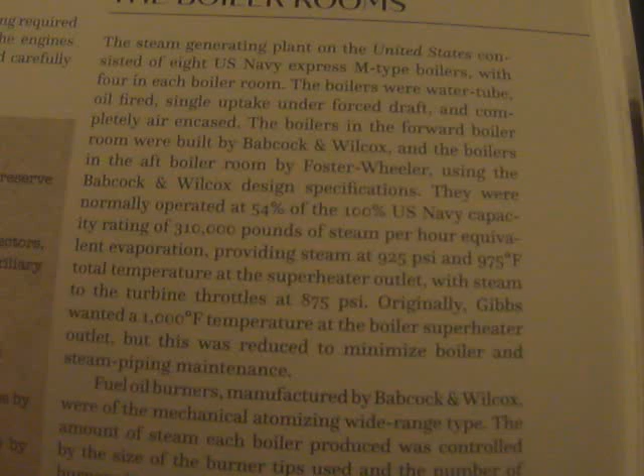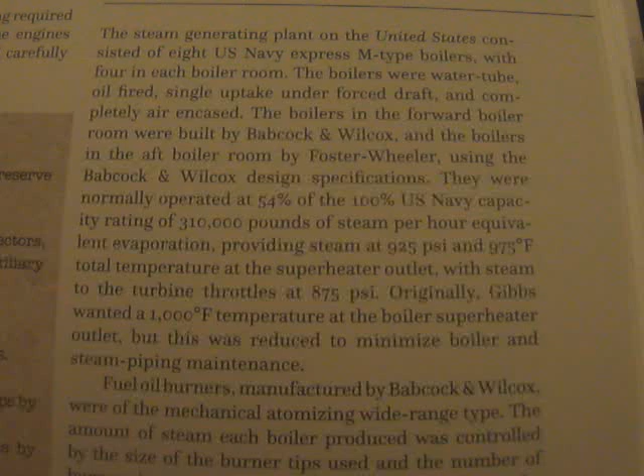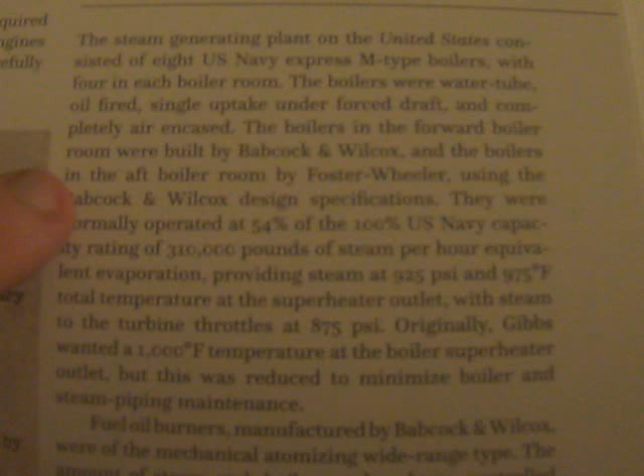Now here we go, we're going to talk about the boiler rooms. The steam generating plant on the United States consisted of 8 U.S. Navy Express M-type boilers with 4 in each room. The boilers were water tube, oil-fired, single uptake, forced draft, and completely air encased. The boilers in the forward boiler room were built by Babcock and Wilcox, and the boilers in the aft boiler room were built by Foster-Wheeler using Babcock and Wilcox design specifications.

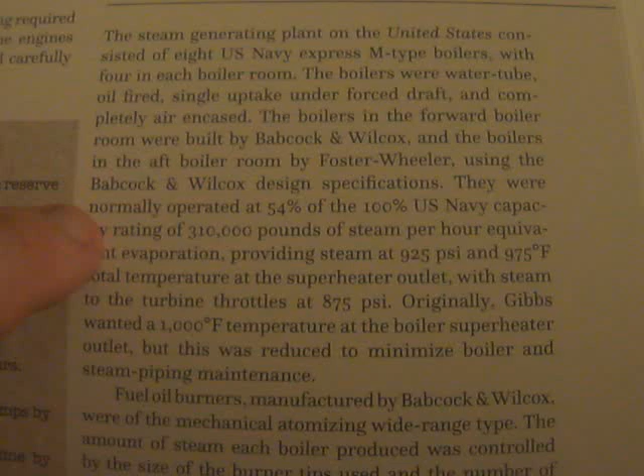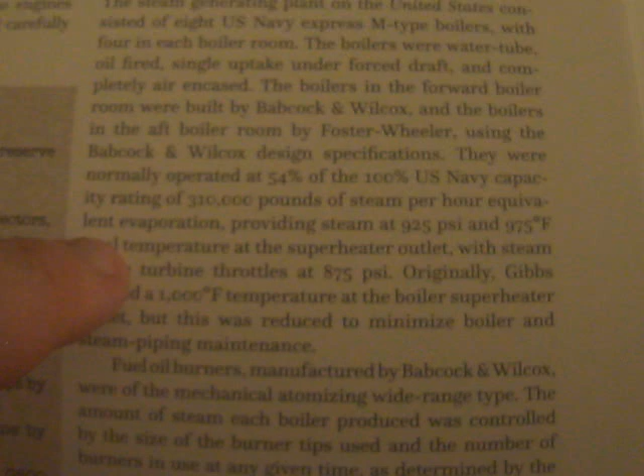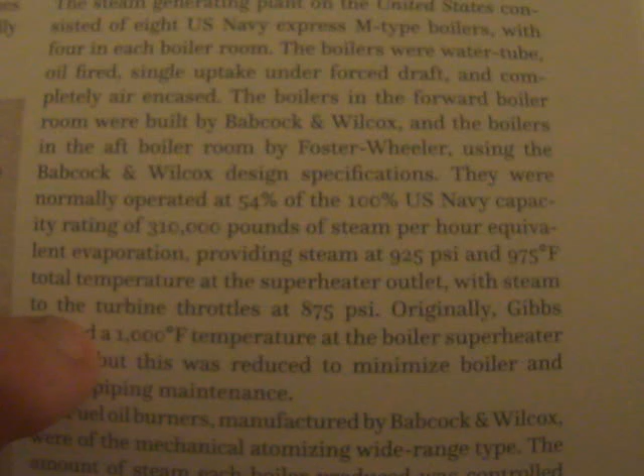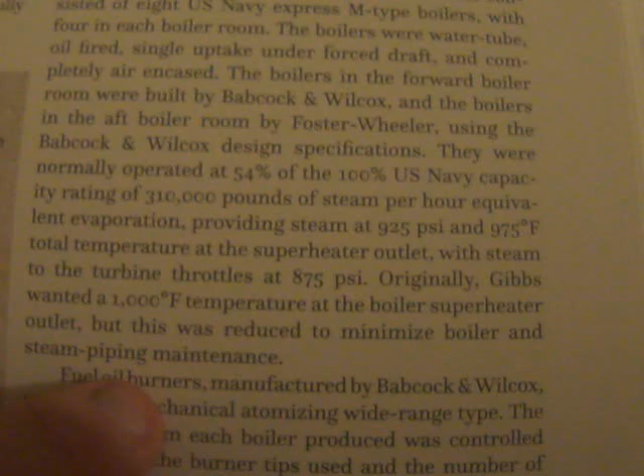They were normally operated at 54% of the 100% U.S. Navy capacity rating of 310,000 pounds of steam per hour equivalent evaporation, providing steam at 925 psi and 975 degrees Fahrenheit total temperature at the superheater outlet, with steam to the turbine throttles at 875 psi. Originally, Gibbs wanted 1,000 degree temperature at the boiler superheater outlet, but this was reduced to minimize boiler and steam piping maintenance. So basically that they didn't have to work on the boilers so much.

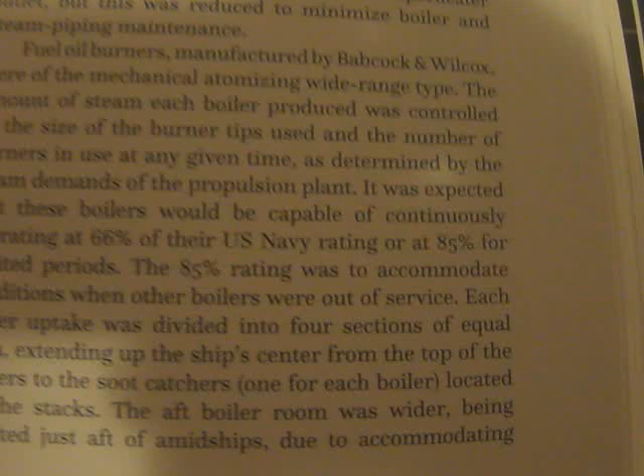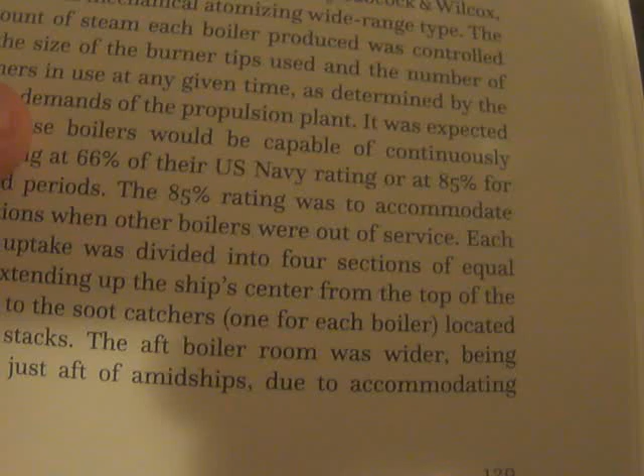Fuel oil burners manufactured by Babcock and Wilcox were of the mechanical atomizing wide-range type. The amount of steam each boiler produced was controlled by the size of the burner tips used and the number of burners in use at any given time, basically the same as the Iowa-class battleships, as determined by the steam demands of the propulsion plant.

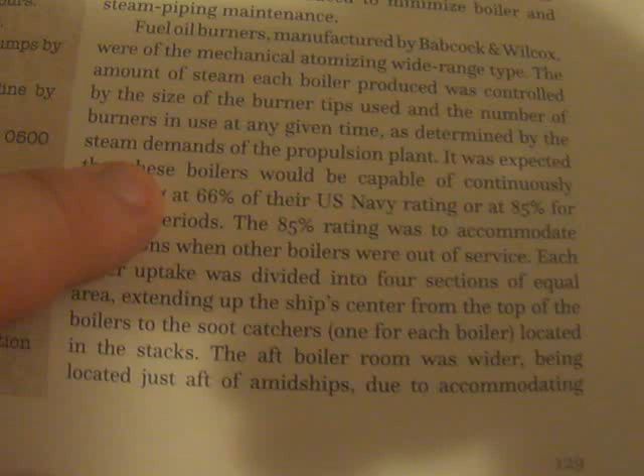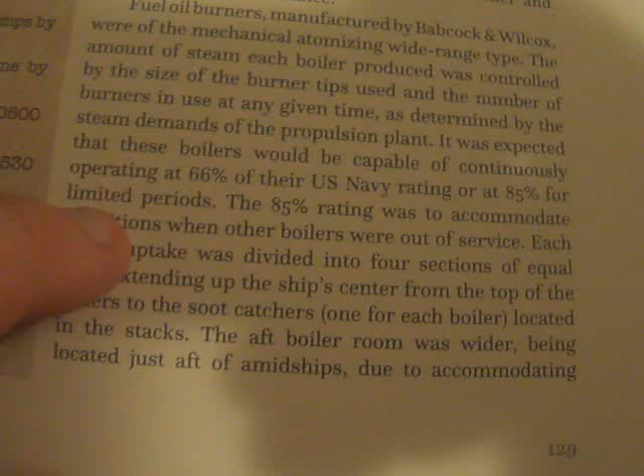It was expected that these boilers would be capable of continuously operating at 66% of their U.S. Navy rating, or at 85% for limited periods. The 85% rating was to accommodate conditions when other boilers were out of service.

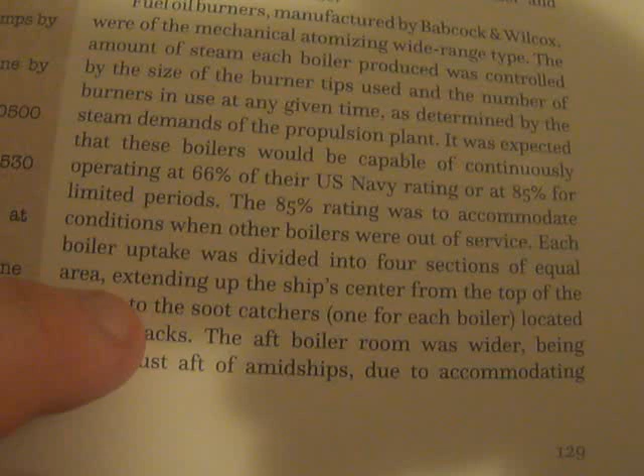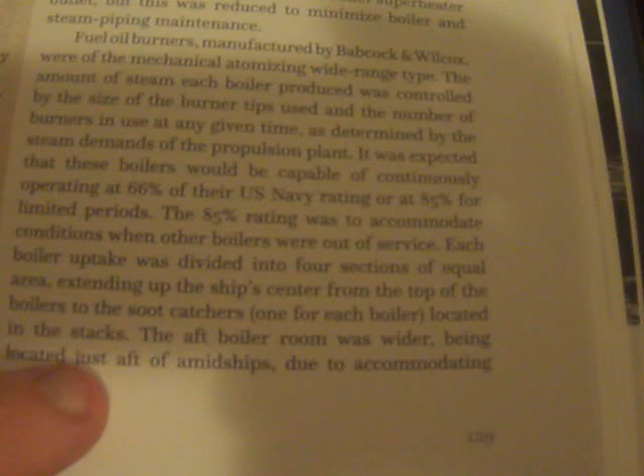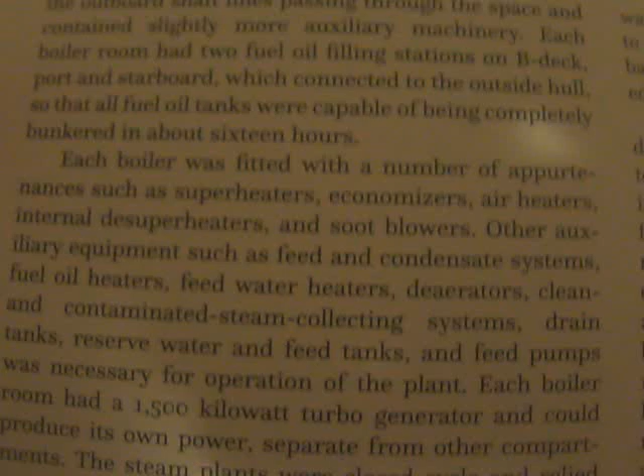Each boiler uptake was divided into 4 sections of equal area, extending up the ship's center from the top of the boilers to the soot catchers, one for each boiler, located in the stacks. The aft boiler room was wider, being located just aft of amidships due to accommodating the outboard shaft lines passing through the space, and contained slightly more auxiliary machinery. Each boiler room had 2 fuel oil filling stations on B deck, port and starboard, which connected to the outside hull so that all fuel oil tanks were capable of being completely bunkered in about 16 hours.

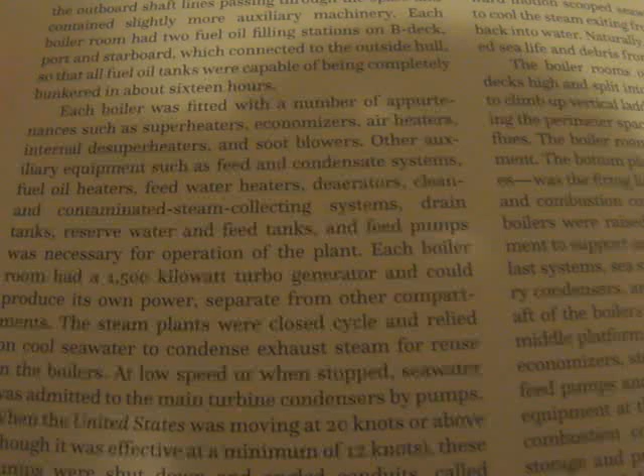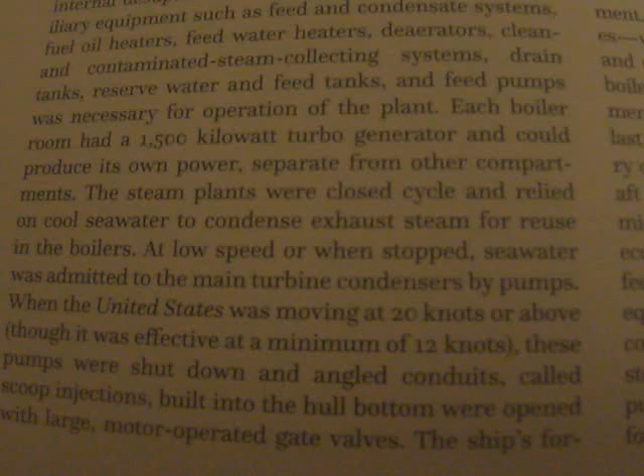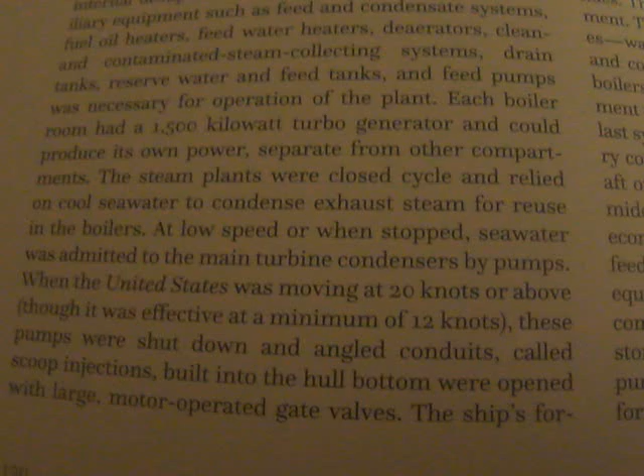Each boiler was fitted with a number of appurtenances such as superheaters, economizers, air heaters, internal desuperheaters, and soot blowers. Other auxiliary equipment, such as feed and condensate systems, fuel oil heaters, feed water heaters, and deaerators, clean and contaminated steam collecting systems, drain tanks, reserve water and feed tanks, and feed pumps were necessary for operation of the plant.

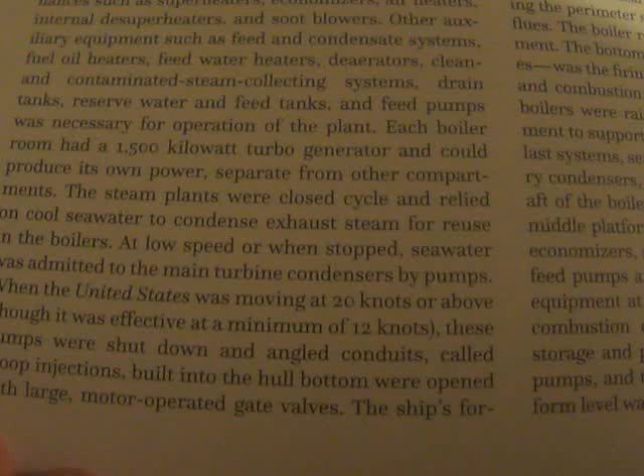Each boiler room had a 1500 kilowatt turbo generator and could produce its own power separate from other compartments. The steam plants were closed cycle and relied on cool seawater to condense exhaust steam to reuse in the boilers.

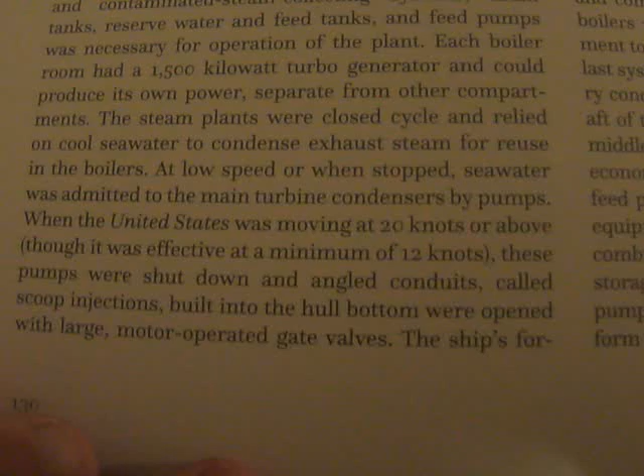At low speed or when stopped, seawater was pumped to the main turbine condensers. When the United States was moving at 20 knots or above, though it was effective at a minimum of 12 knots, these pumps were shut down and angled conduits called scoop injections built into the hull bottom were opened with large motor-operated gate valves. The ship's forward motion scooped seawater through the condensers to cool the steam exhausting from the low-pressure turbines back into the water.

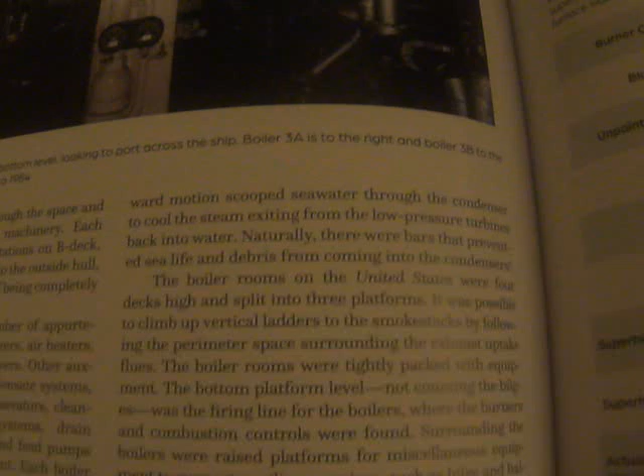Naturally, there were bars that prevented sea life and debris from coming into the condensers. Every now and then they would have to clean that out because of that.

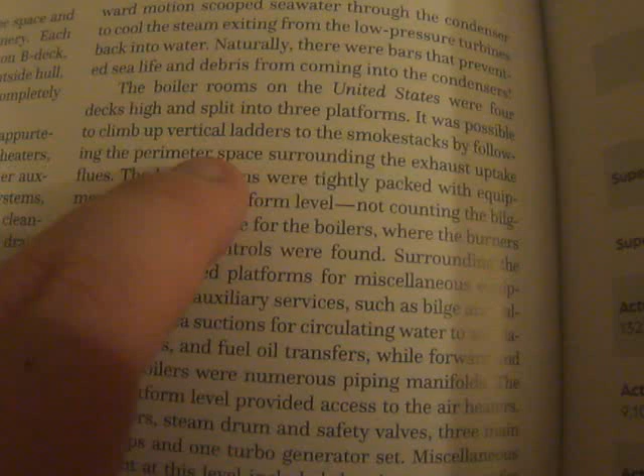The boiler rooms on the United States were 4 decks high and split into 3 different platforms. It was possible to climb up vertical ladders to the smokestacks by following the perimeter space surrounding the exhaust uptake flues. The boiler rooms were tightly packed with equipment.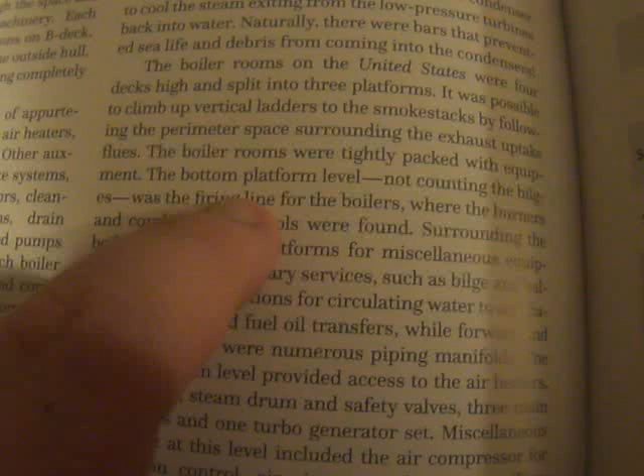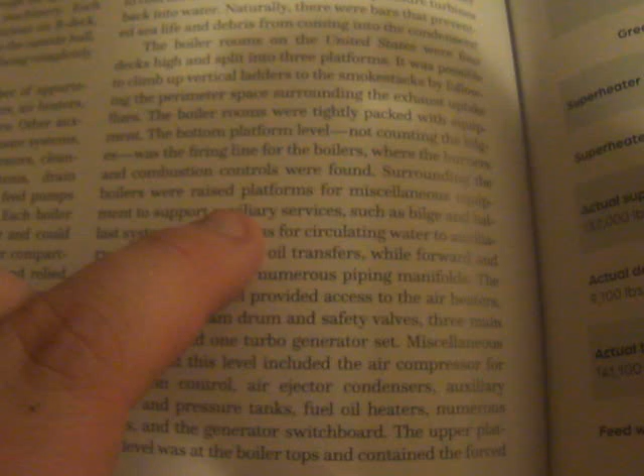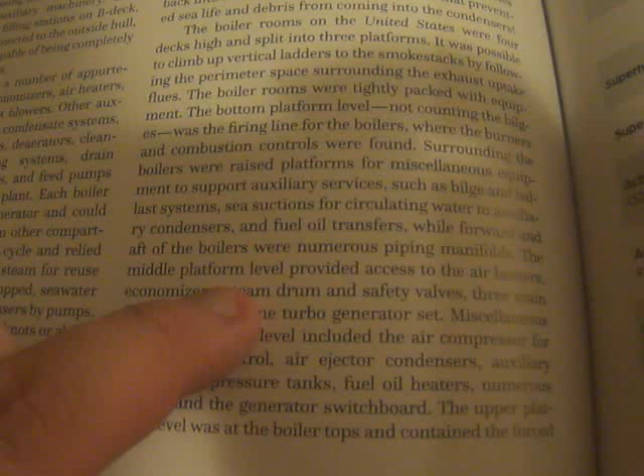The bottom platform level, not counting the bilges, was the firing line for the boilers, where the burners and combustion controls were found. Surrounding the boilers were raised platforms for miscellaneous equipment to support auxiliary services such as bilge and ballast systems, sea suctions for circulating water to auxiliary condensers, and fuel oil transfers, while forward and aft of the boilers were numerous piping manifolds. The middle platform level provided access to the air heaters, economizers, steam drum, and safety valves, 3 main feed pumps, and 1 turbo generator set.

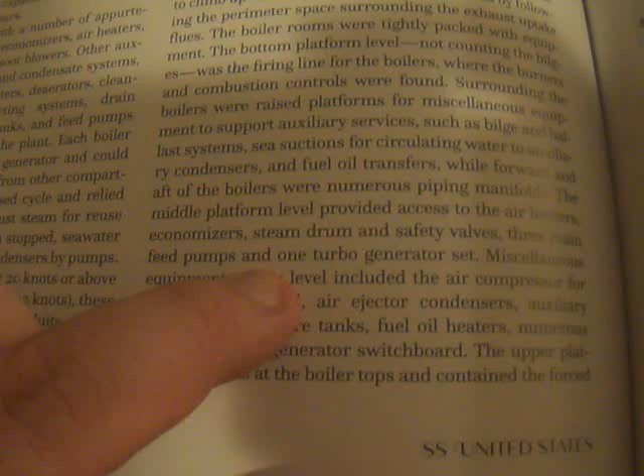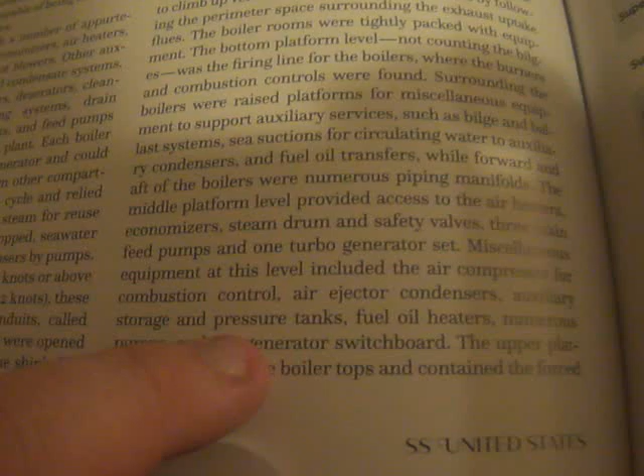Miscellaneous equipment at this level include the air compressor for combustion control, air ejector condensers, auxiliary storage and pressure tanks, fuel oil heaters, numerous pumps, and the generator switchboard.

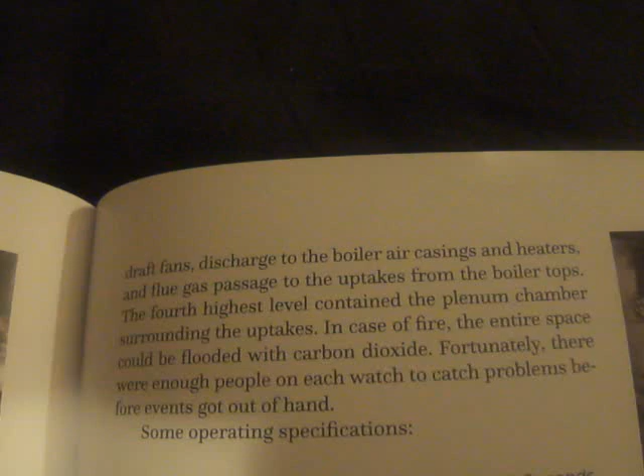The upper platform level was at the boiler tops and contained the forced draft fans, discharged to the boiler air casings and heaters, and flue gas passage to the uptakes from the boiler tops. The 4th highest level contained the plenum chamber surrounding the uptakes in case of fire. The entire space could be flooded with carbon dioxide.

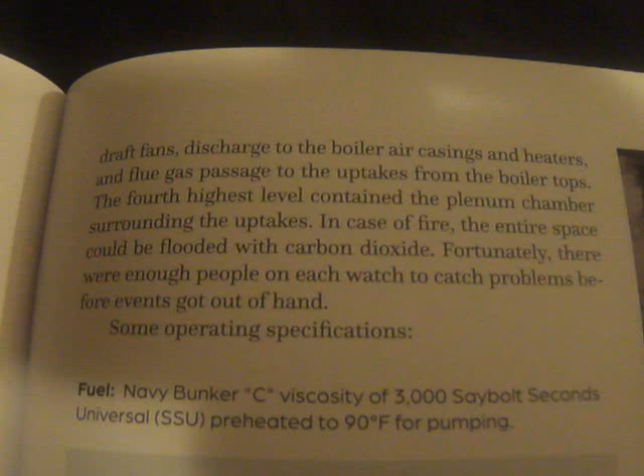Fortunately, there were enough people on each watch to catch problems before events got out of hand.

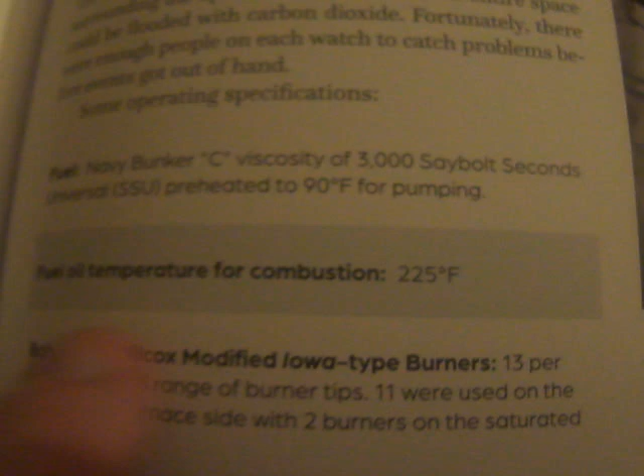Some operating specifications include: Navy bunker C fuel oil temperature is 225 degrees, Babcock and Wilcox modified Iowa type burners, burner color and tip size, superheater outlet pressure and temperatures.

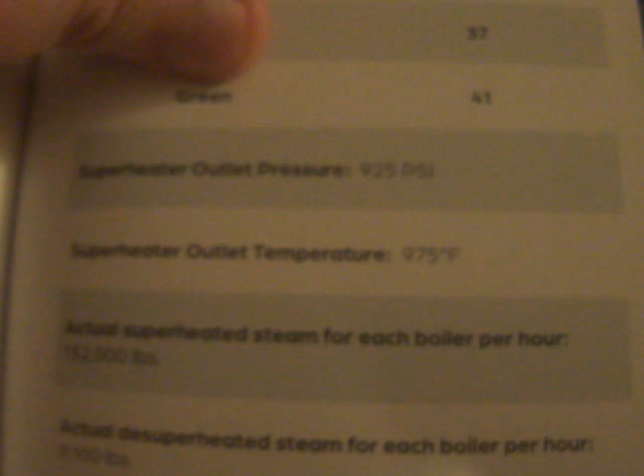So yeah, and there's the aft boiler room controls for it. So yeah, that's the boiler rooms, guys. That's pretty crazy, ain't it? All that power.

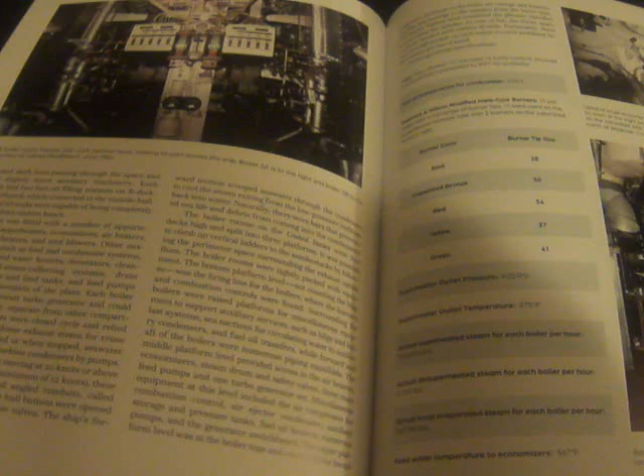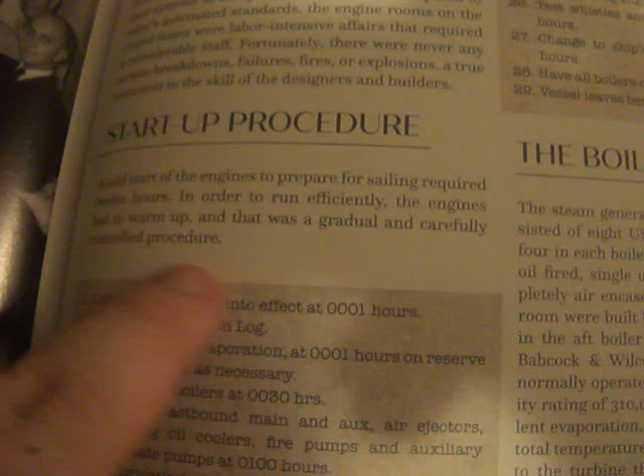Finally, the startup procedure: a cold start of the engines to prepare for sailing required 12 hours. In order to run efficiently, the engines had to warm up, and that had to be gradually and carefully controlled, all the way from light-off watches going into effect at 0001 hours.

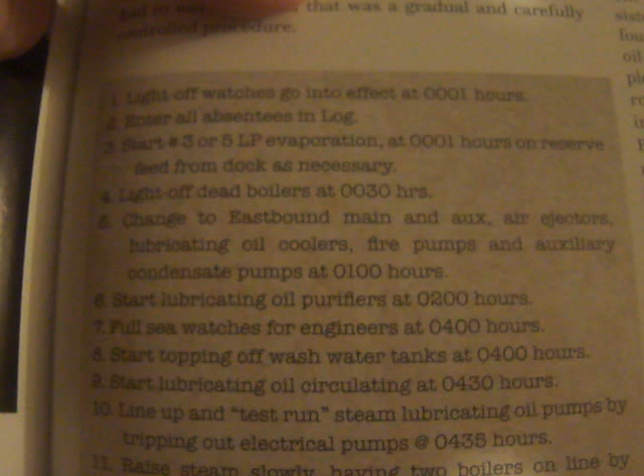I'll just kind of let you look through these. There was a lot that had to be involved to start these engines. It wasn't just like turning a key and boom, boom, boom, that's done. You had to literally warm everything up.

So running a ship like the Big U was a very labor-intensive procedure, and one of the reasons why the ship was pulled from service in 1969.